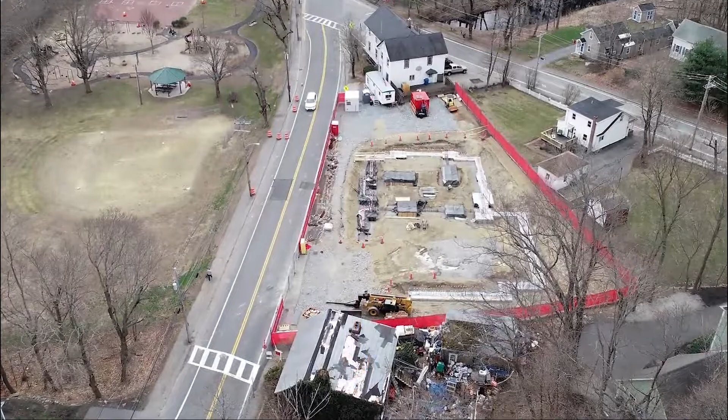There was a lot of public interest in this project, and because of that, it was really important to hire an outstanding project team. That process started with Context Architecture, who engaged all of the community stakeholders, the neighbors here in Ballardvale, the Ballardvale Historic District, the Preservation Commission, and all of the other boards and committees, including our own town building committee, which had to be part of the approval process for this project.

Context Architecture spent almost 2 years working with neighbors, working with the different boards and committees. We had late night meetings, early morning meetings, all for the purpose of bringing consensus around a final design that would ultimately serve the needs of the Andover Fire Department.

And result in a building that fit within the historic character of Ballardvale. The Ballardvale Fire Station, located in the historic Ballardvale district of Andover, was a great accomplishment for our community. We not only needed a building that fit the needs of the 21st century fire service, but we also needed one that fit the historic character of the Ballardvale section of Andover.

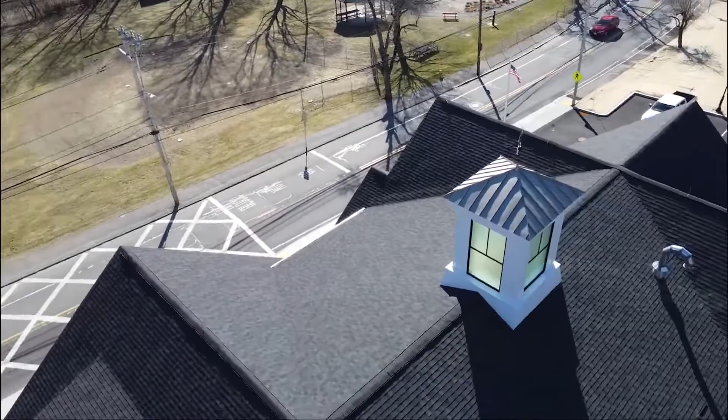The owner's project manager, PMA Consultants, worked tirelessly to keep the project moving and meet our aggressive timeline and established budget. PMA continuously informed all stakeholders and neighboring properties of project operations to ensure relationships were positive, effective, and productive throughout the construction process.

The general contractor, McKay Construction, managed its design, bid, build project on a tight site next to the existing station, which remained operational throughout construction.

The onset of COVID-19 required that McKay and the project team work together to increase safety protocols, fast-track submittals, and seek out material substitutions if needed to keep the project going on schedule without reducing quality.

I'd also like to thank the project team on behalf of Andover Fire Rescue and the Andover community. We are very proud of this project because it is a true reflection of our community. It's a reflection of the input of our neighbors in Ballardvale, and it's a reflection of the input of so many people in our community that helped make this project a reality.

I want to thank our entire project team, from Context Architecture to McKay Construction to PMA Consultants, and to all of our boards and committees and staff that were all part of this project being a success. Thank you for recognizing our efforts.

Congratulations to the project team. Did they stand? All right, we're gonna try that again. Congratulations to the team.

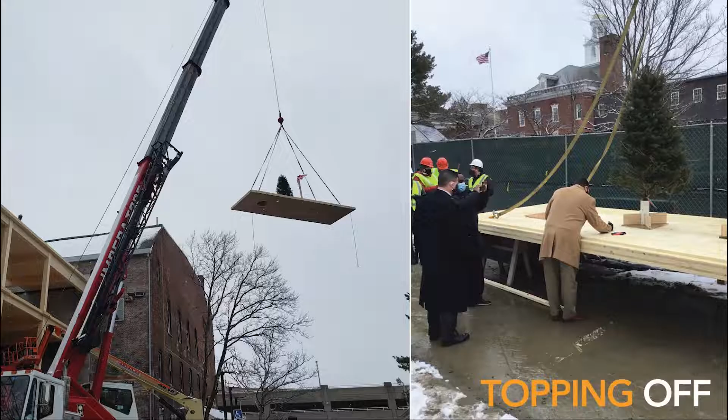The use of cross-laminated timber, CLT for short, presented opportunities for design and sustainability. The new building will achieve LEED Gold certification. The implementation of the CLT structure within the public procurement law required a creative approach with an early design assist package that could only be achieved under the CM at risk procurement model.

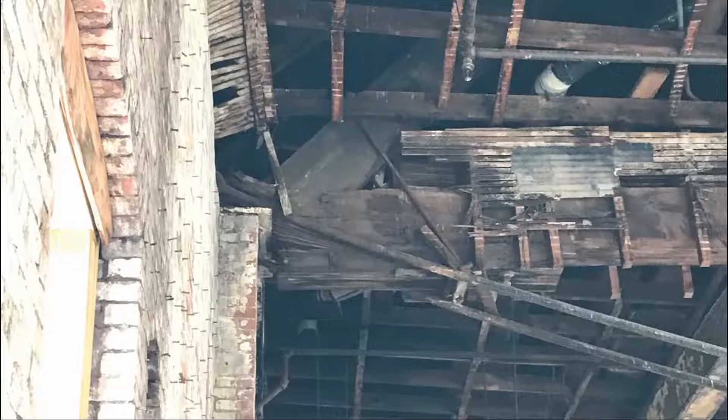The existing building was flanked with 0 lot line adjacent properties and within a few feet of busy Main Street. Several logistical challenges were solved during pre-construction, with creative and cost-effective solutions incorporated into the bid documents. During pre-construction, Bond determined that the adjacent abutting building structure had also deteriorated such that the building planned for demolition was unintentionally providing lateral support of the failed structure of the adjacent building intended to remain.

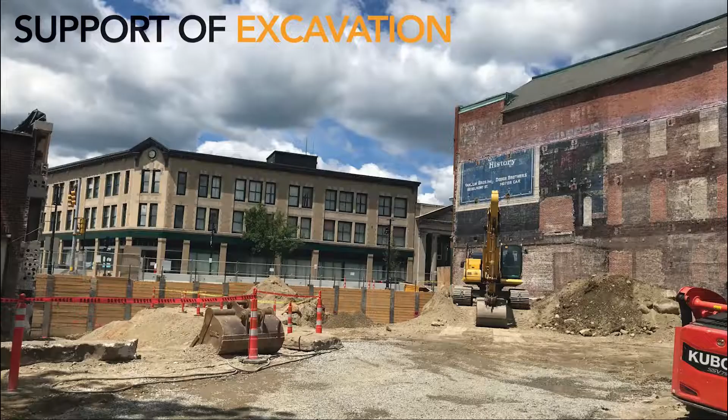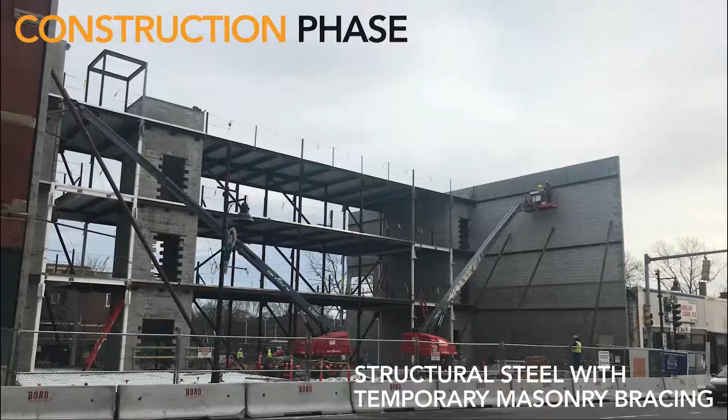Bond collaborated with the design team to develop the most effective approach to retrofit the existing occupied abutting structure to ensure that the demolition of the existing building could happen safely. Bond Building developed an approach that allowed for the 3 planned stories of masonry bearing party walls to be erected in one sequence, temporarily braced ahead of the CLT. This was accomplished with carefully planned temporary shoring elements that were pre-coordinated with the CLT structure.

With the design intending to expose as much of the CLT as possible, the placement and routing of all exposed building systems was critical. Working closely with the design team, Bond Building pre-coordinated the building systems with the CLT elements using 3D BIM technology prior to installation. Bond's partnership with DCAM and the design team allowed for timely decisions when additional challenges arose during construction. In the end, a magnificent project was delivered for which we could not be more proud of.

Congratulations to the project team.

All right, next we have building projects, new construction, less than $100 million. EMD Serono Horizon Building, Billerica, Massachusetts, submitted by Erland Construction.

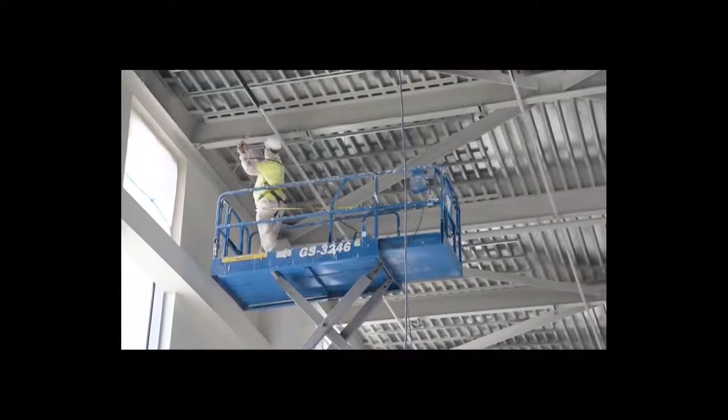If we didn't have that level of respect for safety on the project, it may have been harder to quickly change or influence people to adjust their safety behaviors in response to this new threat of COVID. But I think on this project, because of that early effort to build a safety culture, incorporating COVID protocols came a little more naturally and easily than it might have otherwise.

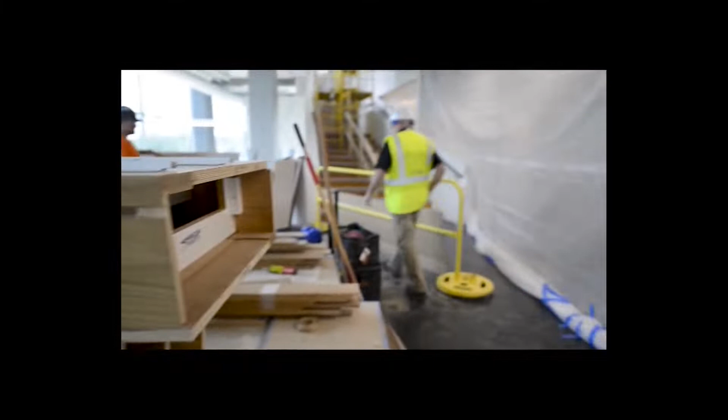Luckily, we were very proactive in buying out our materials early on, and we had the subs storing them off-site, so we really didn't get hit with any manufacturing delays or anything like that because we had everything already procured and waiting for us.

On this project, we implemented a process called Prevention Through Design, PTD. What it does is get the architect, the design people, the engineers, the safety department, and then the end user or owner all together at the table before the building is completed and drawn out.

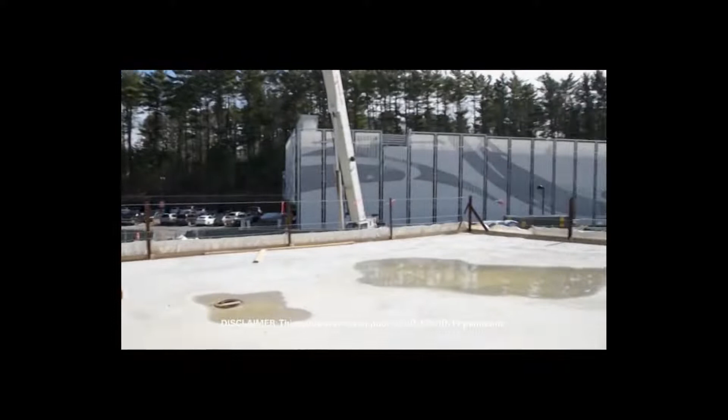There were a couple of instances, like adding roof parapets during construction, so workers never had to tie off on the roof while working up there. Also roof davits, so if we did have to tie off while working on edges, there was a way to do that.

Congratulations to the project team.

Next, we have building projects, new construction, greater than $100 million. The award goes to Brookline High School Expansion Project, submitted by Hill International.

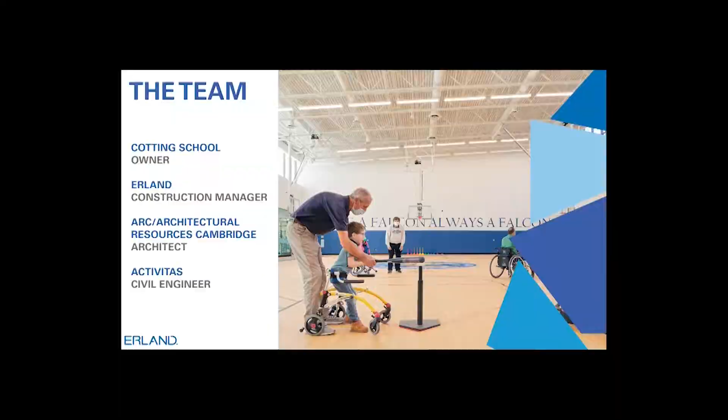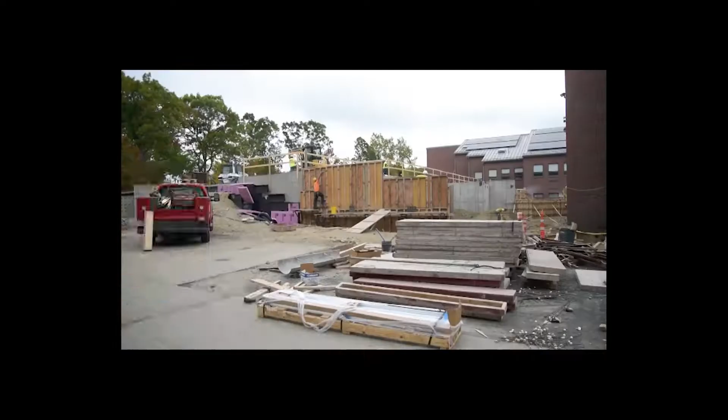Recreational spaces for Friday nights for our Circle of Friends program, with two bowling alleys. It gives us some art space, and as soon as that's completed, it unlocks a whole variety of new spaces within our school. I'm Ben Wallace, president of the senior class of 2021.

This is going to be a great addition to the school. Honestly, I very much look forward to seeing it when it's done, and I think it's going to be really great for our basketball games.

You'll see on the wall when the gym is done, the motto: once a Falcon, always a Falcon. That's Cotting School. This space is a space that we envision to bring people together.

This was typical of the meetings we had throughout the entire process, where the entire team would collectively problem solve—architects, engineers, and contractors listening to each other's concerns and coming together to solve problems successfully, which resulted in delivery of the project on time, under budget, and exceeding owners' expectations. This was a very large and complex project.

Took 30 months, but at the end of the day, it's really nice to go to a game and see the fans, see the athletes, see the community in general, really enjoy what we built and what we all worked so hard to do as a team.

It couldn't have been done without working together with UConn, with the designers, and it was a really successful project and really satisfying to be a part of.

Successful capital projects are symbolic of great project teams. The UConn Athletic District project was just that. We couldn't be more pleased with the entire team effort put forth on a challenging project built during unprecedented times.

Congratulations to the project team.

So we will move now into the infrastructure category. We'll go with infrastructure less than $10 million. Runway 14-32 and taxiways J and J1 rehabilitation, Logan International Airport, submitted by Massachusetts Port Authority.

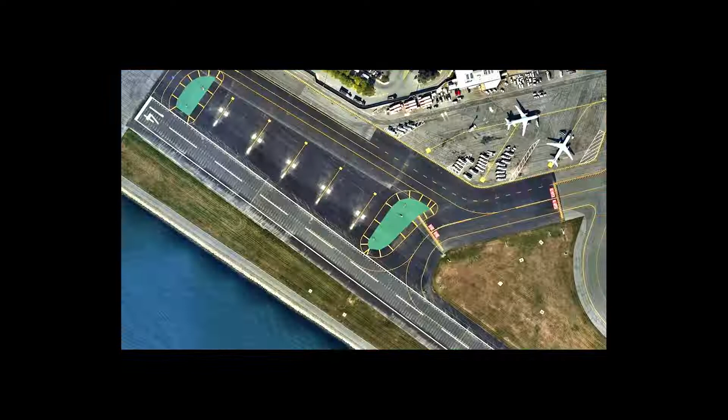At Massport, safety and security are our top priorities. We are regularly updating our facilities and infrastructure at Boston Logan International Airport to maintain safety and construction standards. Due to the pandemic, we've had to make some strategic adjustments to our business practices.

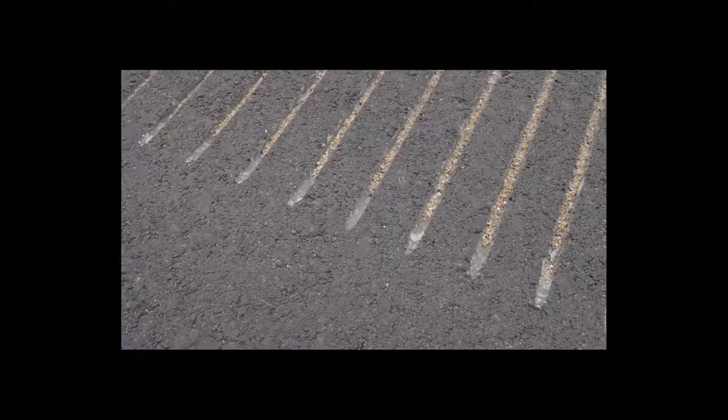This was a necessary project to improve the runway and taxiways pavement condition index to meet the FAA's safety standards, as well as improve drainage, skid resistance, and update the lighting system.

The entire project had to be done in 60 days. A group of project managers and staff worked closely together to produce a design, set of bid documents, and construction phase services on the fly.

Together, we rolled up our sleeves and got the job done as smoothly and professionally as a consultant would. The result was a successful project that was completed under budget.

Working with the Massport team, McCourt Construction was able to complete the rehabilitation work to improve the surface condition, ride smoothness, friction, and drainage characteristics of the runway and taxiways to reduce the potential for foreign object debris. Due to Massport's seamless coordination, we were able to complete this project on time.

The project schedule required a 25-day closure on runway 14-32. Through our routine coordination meetings with project and airport staff, the airlines, and the FAA, we were able to get the job done with little to no impact on the airport and airline operations.

We worked efficiently together, which allowed us to reopen the runway 6 days earlier than scheduled. The project to rehabilitate runway 14-32 and taxiways J and J1 is an example of our team innovation and creativity.

We utilized our in-house talent to design the project using 3D technologies, leading to considerable savings in engineering fee. Congratulations to the entire team who worked on this project, and thank you to CMAA for recognizing their hard work.

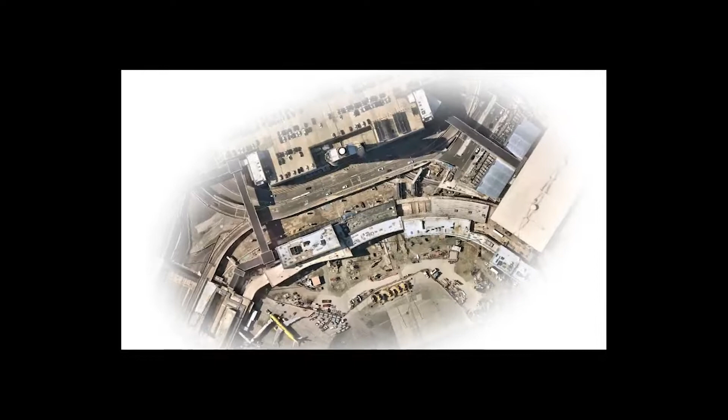The team used BIM and Lean effectively to design and construct the project within this very congested site. This design bid build project included a complex steel girder viaduct structure with at-grade roadway within a confined work zone

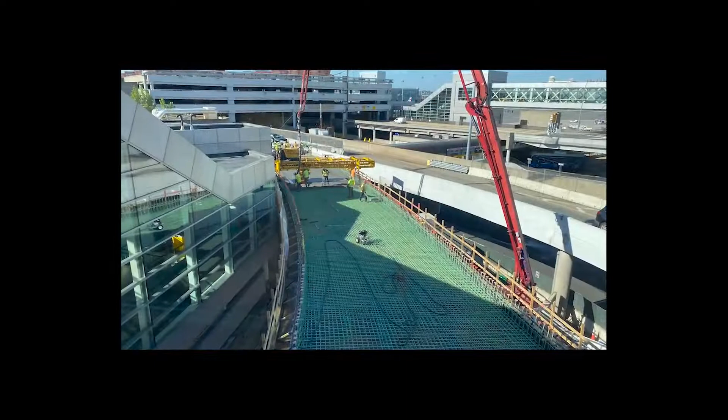and active pedestrian and vehicular traffic adjacent to and often bisecting the site.

The project also included the modernization of airport utility services, preservation of existing critical infrastructure, and detailed coordination of connection services to adjacent projects. To combat this congestion below grade, the project team made use of intensive federated 3D modeling

and clash detection during both the design and construction phases. This site presented many logistical challenges, with adjacent projects on 3 sides and the concurrent demolition of the old air traffic control tower at the center of the project.

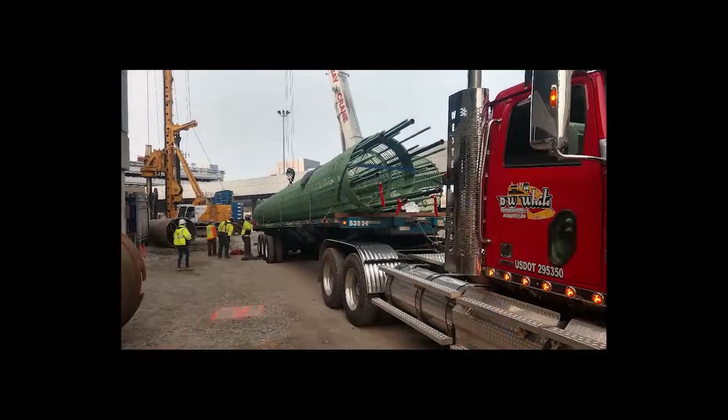Despite the congested site, D.W. White and the entire project team were still able to prioritize airport security and the safety of all on-site personnel, with 0 OSHA recordables or lost time accidents throughout the duration of the project.

The lean process has enabled us to perform efficiently and pivot effectively. We co-located in a Big Room to problem solve as a team. We use the Last Planner system to streamline our workflow through task level scheduling, pull planning, and weekly check-ins.

The transparency and accountability of lean allowed stakeholders to understand each other's needs and perform as one unit toward one vision of the completed project.

The Terminal C3A roadways project was complex and challenging, but thanks to our partners, Stantec and D.W. White, we were able to successfully complete the project and fulfill Massport's condition of satisfaction.

Congratulations to the project team.

All right, we already got Massport, so we'll just get a Stantec photo and we'll move forward.

Infrastructure less than $50 million. Exit 103 Open Road Tolling and Bridge Reconstruction Project, submitted by WSP.

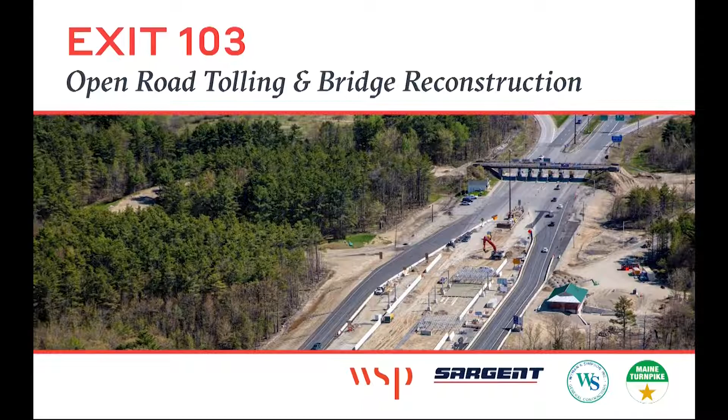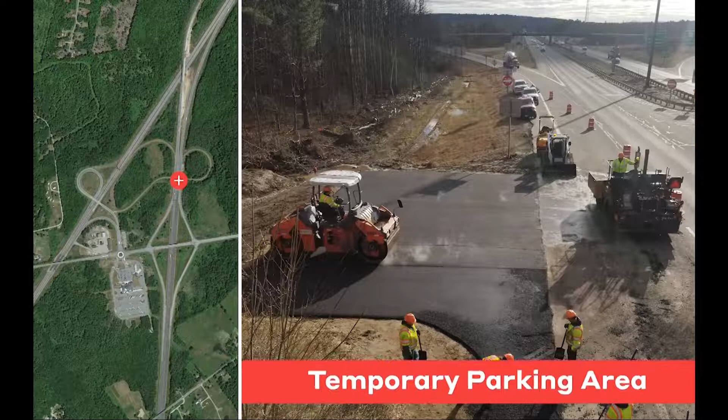Known for its natural beauty and rugged coastline, Maine attracts adventurers all year long. At one of the busiest exits in the state, Maine Turnpike Authority's Exit 103 Open Road Tolling and Bridge Reconstruction Project safely and successfully improved the roadway and kept traffic moving for both residents and vacationers. The I-295 and I-95 intersection is critical for inter-region travel and the Maine economy.

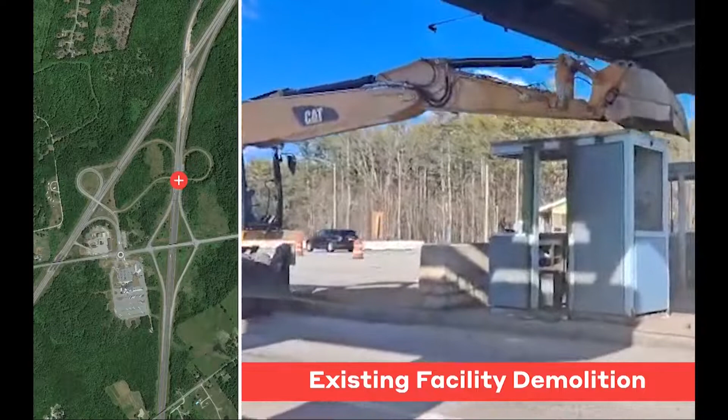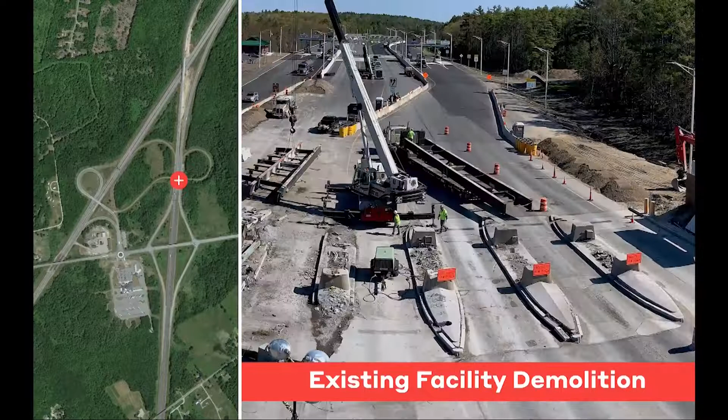Bringing together both ORT and bridge reconstruction simultaneously required a team with a singular focus and clear lines of communication. The WSP team worked closely with two separate contractors, Sargent Corporation for tolling work and Wyman & Simpson for bridge reconstruction. Multiple contractors, work area overlap challenges, and a global pandemic contributed to the project's complexity, but daily communication, innovative thinking, and creative planning all contributed to the project's success.

Expert maintenance of traffic planning aided in keeping the project on schedule and traffic moving. The use of a cable saw allowed for a less destructive demolition of an existing canopy, allowing its removal without interrupting traffic, one construction phase sooner than originally scheduled.

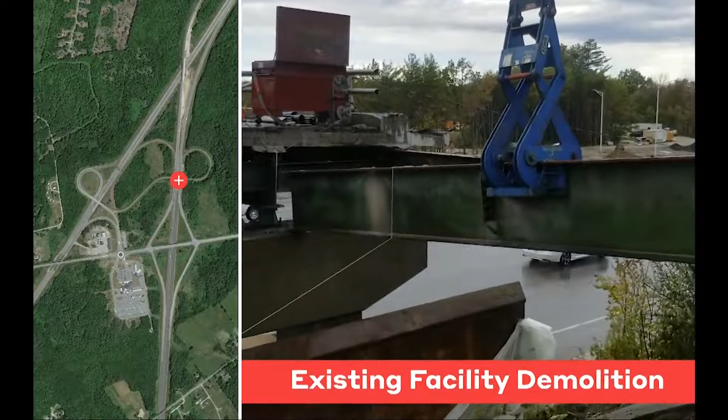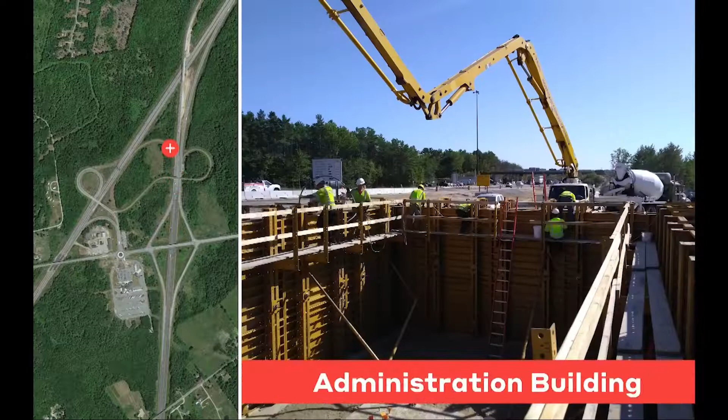Serving as an extension of Turnpike Authority staff, the WSP team partnered with each of the contractors and a field-engineered design was developed to maintain traffic throughout construction. The nimble teams met daily to discuss the day's activities and adjust, if needed, to adhere to the project's critical path schedule.

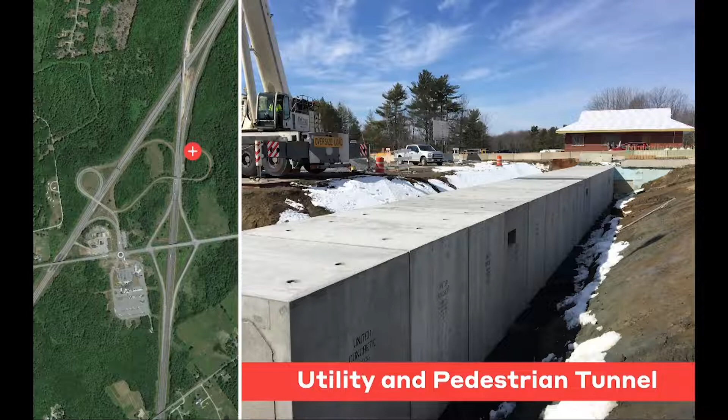Also included in the contract was construction of a new administration building and tunnel for toll booth operations and maintenance. Uniquely, this building includes a full-height basement, allowing for the build-out of full communication systems in an easily accessible space. Traditional construction materials and innovative means and methods were brought together safely, effectively, and on budget, ensuring a successful roadway enhancement that keeps Mainers moving.

Ensuring a successful roadway enhancement that keeps Mainers moving.

Congratulations to the project team.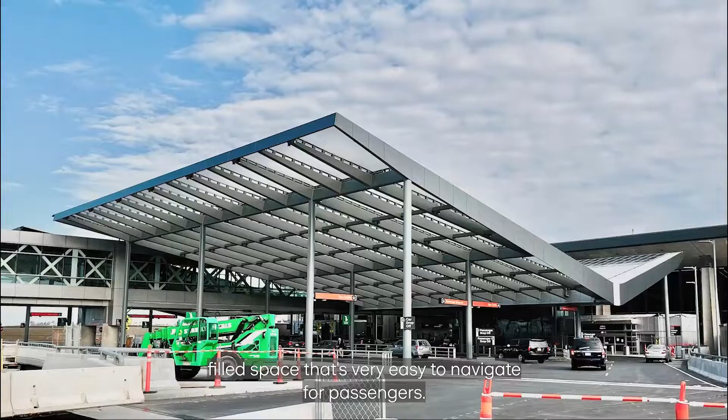For Massport, it's all about the passenger experience. This design transformed the whole curbside experience into a light-filled space that's very easy to navigate for passengers. Design innovation and sustainability are also really critical to Massport.

This air-supported roofing system is so lightweight, it requires significantly less structural steel, which of course saves carbon. The solar panels generate clean power for lighting and other canopy electrical loads with a surplus, making this a net positive energy project. This highly visible and public-facing project had extensive communication and engagement with stakeholders, airlines, and Massport's operations team.

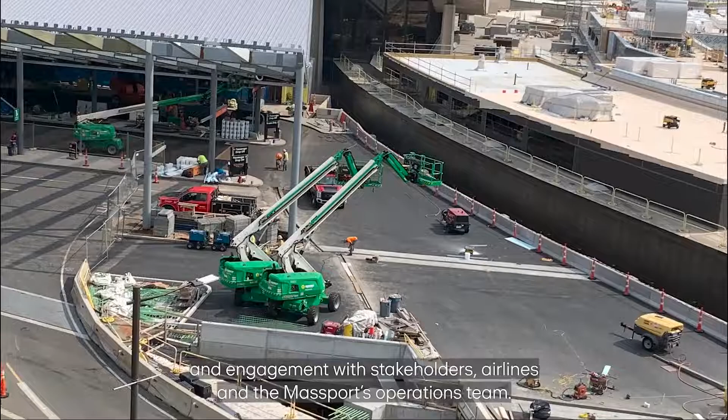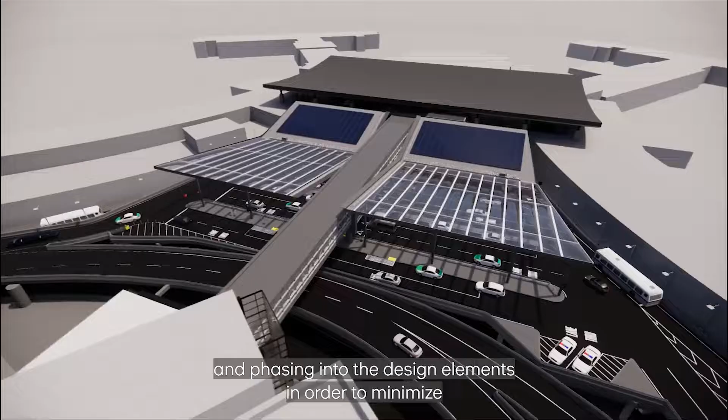These partnerships allowed this disruptive and complex project to be carried out successfully with relative minimal impact to airport operations. During the pre-construction process, our plan was to integrate constructability and phasing into the design elements in order to minimize disruption to the airport traffic and traveling public.

A tremendous amount of work went into pre-planning and traffic modeling to minimize the potential impacts to the ongoing daily operations. It was important not only to strive for zero safety incidents amongst the workers, but also to protect the airport passengers and employees throughout this project.

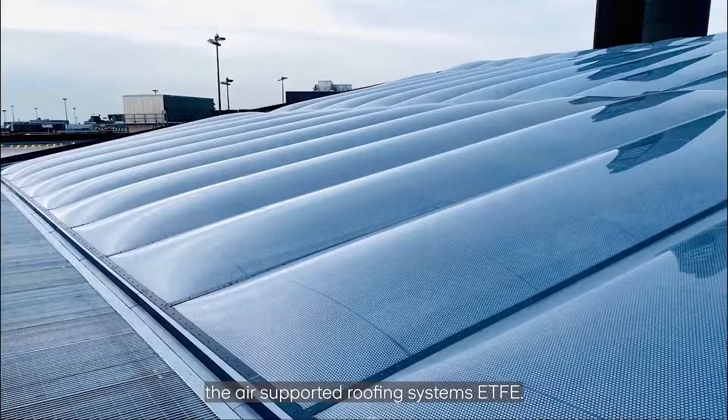The project consisted of some high-risk trades like demolition, structural steel, roofing, elevators, and most importantly, the air-supported roofing systems, ETFE. In three years, we logged over 380,000 craft worker hours with zero lost time incidents.

When it comes to lean construction, the project team worked hand in hand with Massport to implement the last planner system, practice the plan-do-check cycle, transform the big room approach into a digital space at the onset of the pandemic, all to reduce waste and promote continuous improvement throughout the project.

Massport is thrilled with the outcome of the Canopy project and would like to thank the entire team that came together to make this endeavor a success, not only for Massport and our partners, but for the traveling public that we serve. Thank you, CMAA, for recognizing us.

Congratulations to the project team.

Infrastructure greater than $100 million: Berth 10 construction, Conley Terminal Modernization Program, submitted by GEI Consultants.

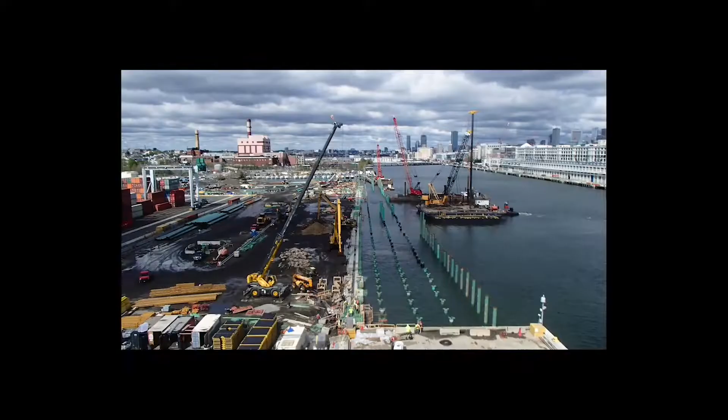The new Berth 10 creates 1,300 linear feet of berthing and is designed to accommodate 14,000 TEU post-Panamax cargo vessels. The deck is supported by 862 26-inch and 30-inch diameter steel pipe piles, between 60 and 105 feet in length.

Dredging and underwater rock blasting were implemented to achieve the desired draft of -50 feet mean lower low water. Work had to be coordinated around a time of year restriction issued by the regulatory agencies.

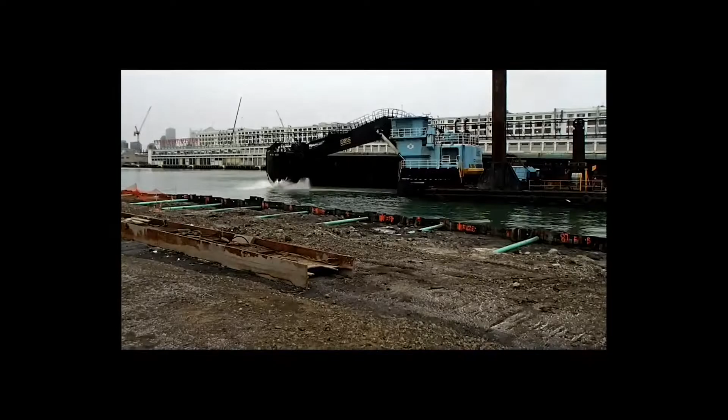Construction had to take place within an operating container terminal without impacting existing operations. Waterside work had to be coordinated within a narrow 600-foot wide channel, adjacent to active cruise and container vessel operations. Work took place during the start of the COVID pandemic.

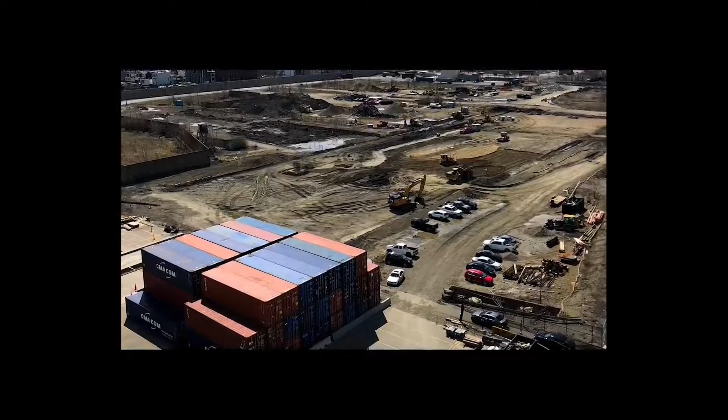The team utilized the Cooperative Soil Management Plan, where no urban fill or oily soil was transported for off-site disposal in landfills. Instead, it was treated, rendered inert, or processed and retained on-site.

Massport maintains an extensive outreach program with the community and incorporated community input into the project. The team fostered and maintained a close, productive relationship with the contractor throughout construction. The project was completed ahead of schedule, finished under its budget, and had no cases of COVID.

With the completion of the new Berth 10 and commissioning of the 3 new cranes, Conley Terminal is big ship ready. This regionally significant project allows the Port of Boston to remain competitive and ready for growth.

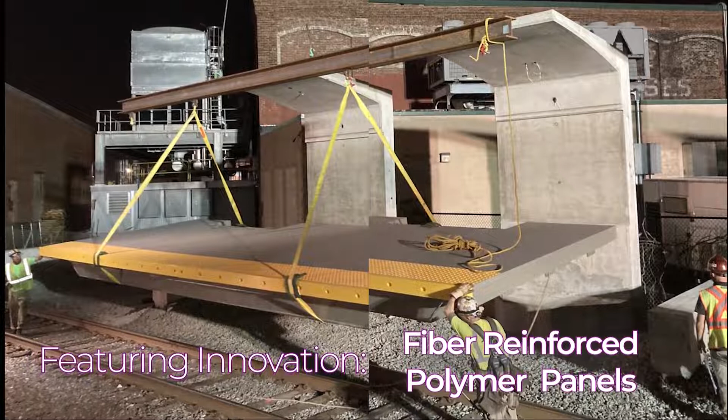This was the first state permit to use FRP for a station. Extended life and low maintenance are key for MBTA.

While the signal and PTC were getting upgraded, 6 track crossings were reconstructed with minimal impacts to rail operations and car traffic.

AECOM wishes to thank MassDOT and the MBTA for the opportunity to design the station, and CMAA for the recognition of this project.

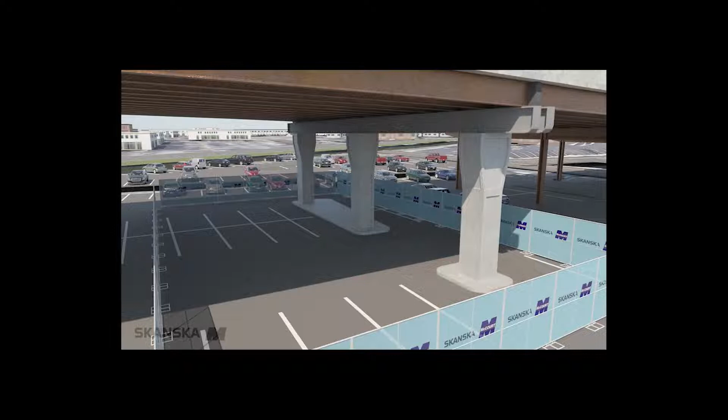The design for the Chelsea Viaduct replacement was simple: cast concrete piers around the existing columns, install new steel sister beams, demolish the existing bridge superstructure, and...

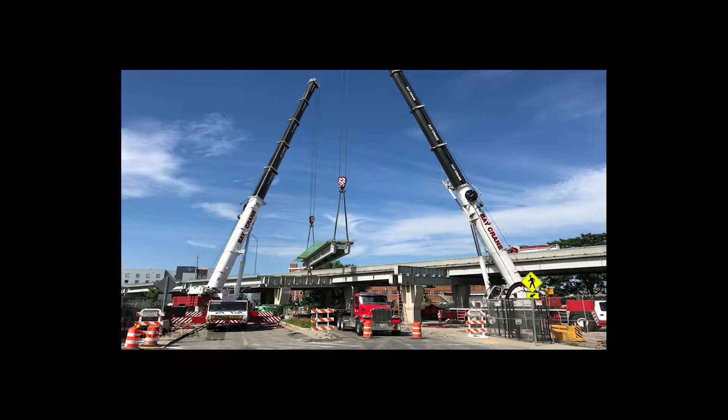Construct a new deck that included the use of 313 prefabricated bridge units, the most ever used on a job in New England. The contract documents suggested the work to be performed at night, on top of the elevated roadway, in 2 separate work zones.

Steel towers were to be erected under the roadway to support it during the work. Each night, roadways were reduced to 1 lane each way with zipper barriers. There were heavy fines in the morning if the lanes were reopened late.

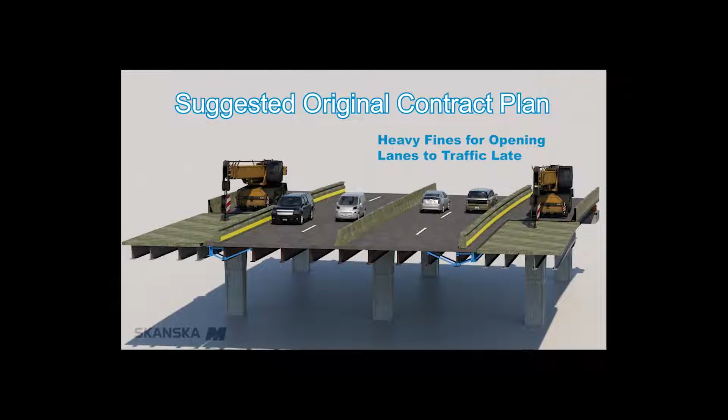The Skanska-McCourt team devised a plan to perform the work within a single, permanent work zone, with most of our equipment operating from the ground during the day.

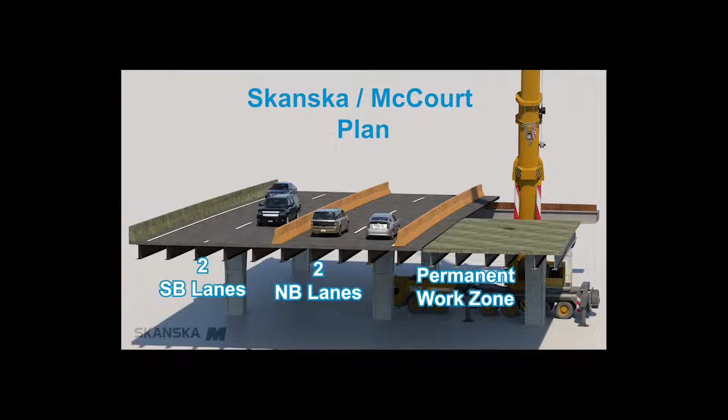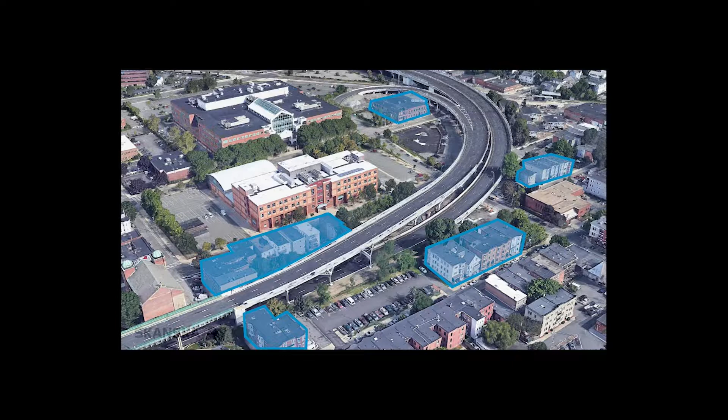This significantly reduced the impact of construction on the Chelsea abutters. Many of their houses were a few yards from the elevated roadway structure. The elimination of the below-deck support steel and the zipper barriers significantly reduced the risk and resulted in a savings of $15 million for MassDOT.

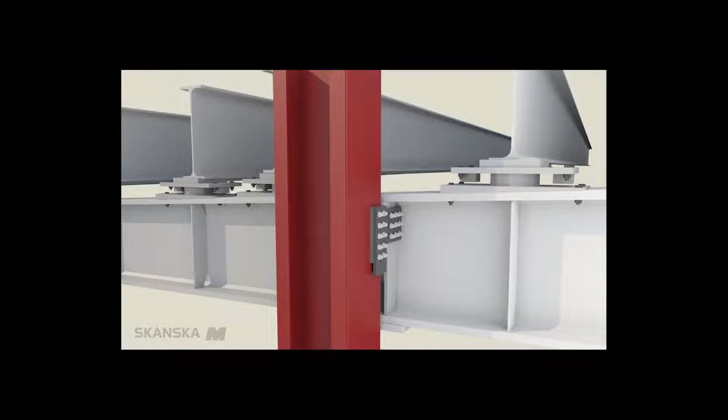Our team modeled the entire project in 3D to perform a constructability analysis. We detected some issues with existing column locations. We helped with the successful design solution of a critically sensitive connection detail between the new and existing bridge structures. We modeled the bearing connections of the PBUs and the sister beams, successfully eliminating potential fit-up issues. We worked with HNTB to make the reinforcing steel fit within the formwork for the cast-in-place concrete piers.

At the conclusion of construction, Mass DOT expressed their satisfaction with our transparent and collaborative team approach to the work. They acknowledged that our risk mitigation protocols helped make the Chelsea Viaduct project one that we can all be proud of.

We are thrilled to welcome members of this stellar project to the stage to share some additional insights into what made this project a success.

Forgive me for keeping your bios short. Paul Panini is Senior Vice President for Skanska, responsible for all civil operations in New England. He also founded and manages Skanska's National VDC Center of Excellence in Boston. Paul was instrumental in the creation of the Skanska-McCourt Chelsea Viaduct work plan and assisted in various engineering solutions during the job. Paul received a bachelor's degree in civil engineering from Tufts University.

Rob Pine is Vice President of Operations for Skanska and has almost 30 years experience in construction supervision and management, concentrated in heavy civil construction projects. Rob was instrumental in the de-risking of the Chelsea Viaduct project. He served as the project executive for the job, overseeing all aspects of the work, and was the primary contact with the Mass DOT management team. He has a bachelor's and master's in civil engineering and is a registered professional engineer.

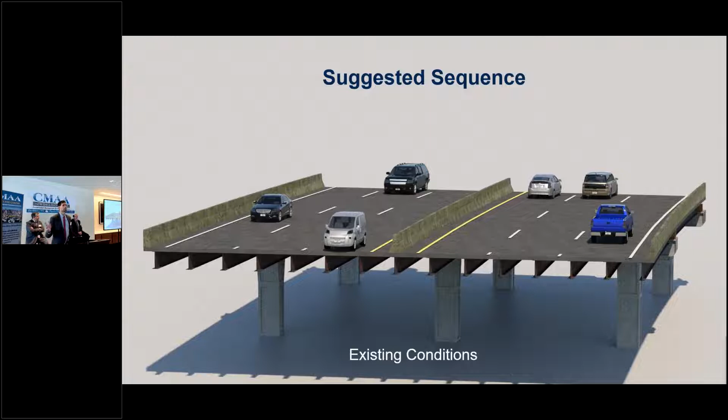The suggested sequence for the project: we had the Route 1 viaduct heading north and south through Chelsea, 3 lanes in each direction as the existing condition. The suggested sequence was to reduce those 3 lanes down to 2 in each direction using a zipper barrier to create smaller daytime work zones, and then at night use that zipper barrier to create a 2-lane work zone to actually achieve anything.

It's such a tight area, such a dense community, this was the only way to go forward with it. You can see underneath there a little bit of the blue overhang bracing, which was to be the whole length of the job per the suggested sequence, based on cut lines, existing framing, and all of those details.

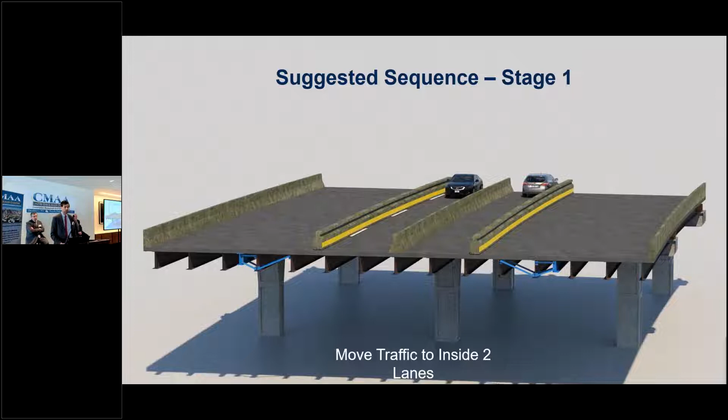So we've reduced our lanes down to 1 each at night, and now we have a work zone where we can actually start doing some demolition and reconstruction. You can see the blue shoring towers that come into play here. Originally, a lot of the equipment was planned to be staged on the deck - a very deteriorated structure, which is why we're replacing it. So that was a risk we looked to mitigate and improve upon.

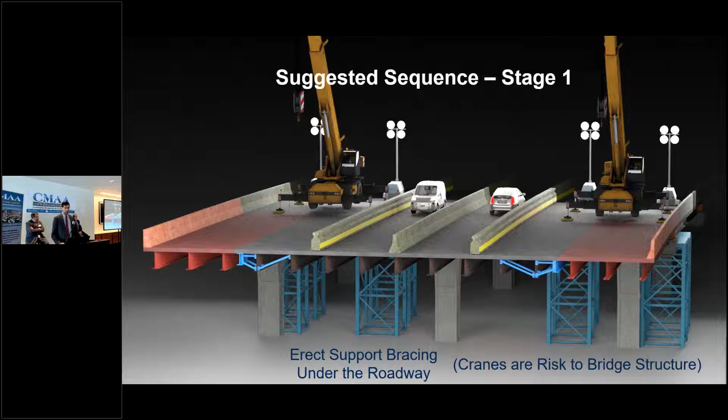So each night you take your lanes down to 1, go in, start to do some demolition, and put the PBUs back. That was every single night - each night was its own rapid construction sequence.

You can only move as fast as your slowest link, right? So there were some inefficiencies there that we looked to improve upon, creating more permanent work zones so we could produce better productivity, better schedule certainty, and everything that comes with that.

As far as the traveling public goes, the zipper barrier is difficult - you rely on the equipment which moves it, and there's a weather component to it. If there were any challenges or differing conditions that came up during each rapid construction night, that had a potential impact on the traveling public the next day. So that was a big risk for us, for the owner, for the traveling public, for everyone. That was one thing we really tried to focus on changing.

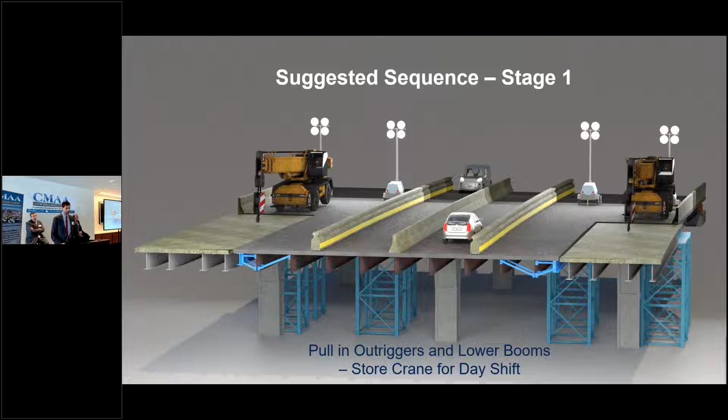To take you through the rest of the suggested sequence: basically it was 3 stages. We worked from the outside lanes in. You can see here this would be a daytime condition where we're back to 2 lanes - we've replaced a piece of the bridge, and we're getting ready to do it again each night.

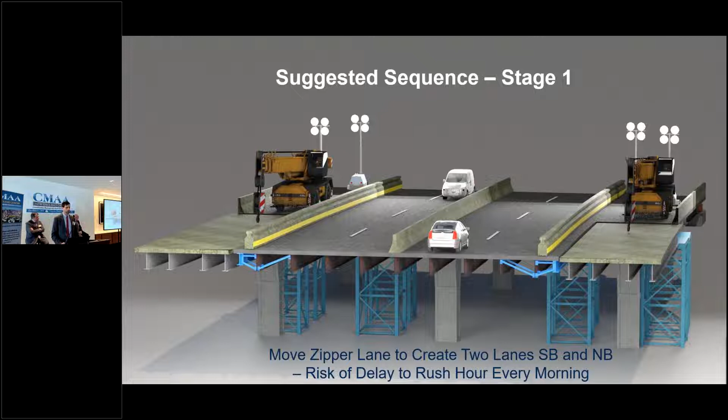Stage 2, running up the middle, also provided its own unique challenges where you have 2 single lanes of traffic in a barrel on either side of you. For the traveling public, emergency response is really difficult here - we've got 4,000 feet of viaduct, and to get a tow truck in there to service a broken down vehicle, you're doing a lot of extra moves you wouldn't have to with 2 lanes side by side. Also, working in a tight zone like that for the workers is just an inherent risk. So that was something we really focused on changing and improving upon.

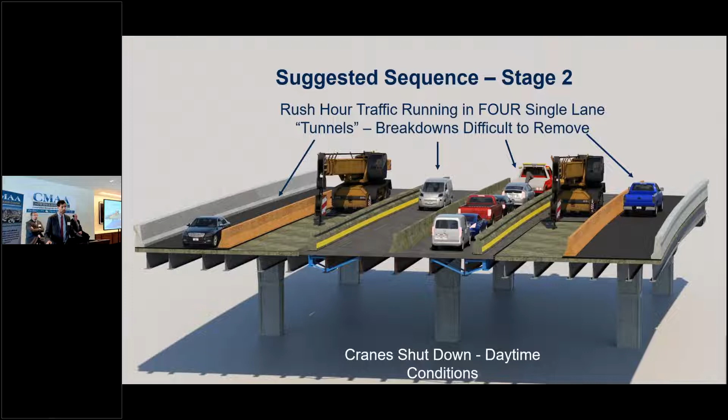Risks and realities that we came up with: the demolition and PBU erection was too much for one season. Another interesting thing with the suggested sequence was that in the first year, you build all the substructures - concrete columns with sister beams running underneath the existing structure, about 4 inches underneath, ready to receive PBUs to let you do this in a rapid fashion. That was considered the first season. The next season, you get up top and start doing demo and reconstruction. It was a lot of work to envision doing all of that in 1 year.

So the sequence that we came up with allowed us to stretch the schedule across both seasons on the superstructure side, which again made it more of a controlled build for us. The majority of the work, as shown, was to be performed at night.

This is a really, really dense community. There are areas where you can reach off the side of the bridge and you're touching the fascia, the facade of someone's house. So demolition, vibration, noise, dust, all those things at night, that was going to be an impact to the community and all the abutters, and something that we really wanted to improve upon if we could.

The zipper lane, which I talk about, the weather and the equipment, that's just a risk of using the zipper barrier. The reliance between demo and PBU erection, again, the inefficiencies of you're only as fast as your slowest operation, because everything has to be completed every single night.

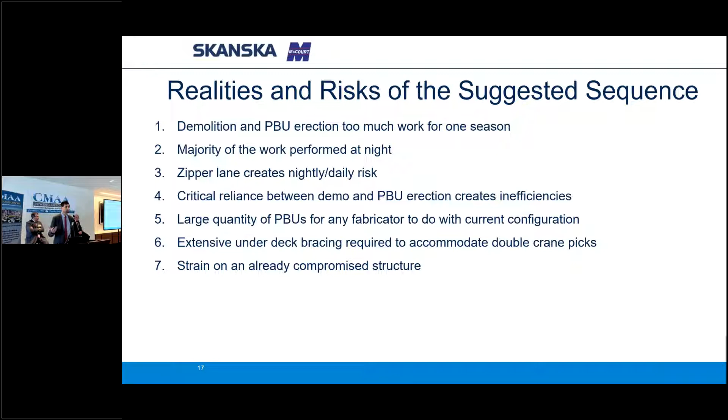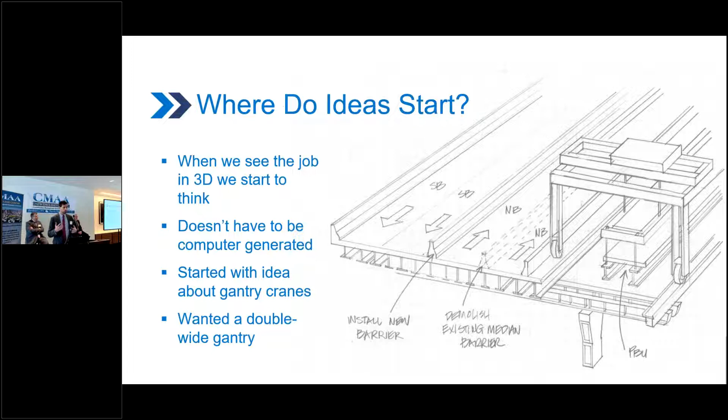So here's what we did. We started back at the main office before we bid the job with some conceptual ideas as to what we could do to create more permanent work zones. It started in sketches and migrated into a 3D model. We had a gantry scheme at first, which we moved away from, but that was kind of the origins of it.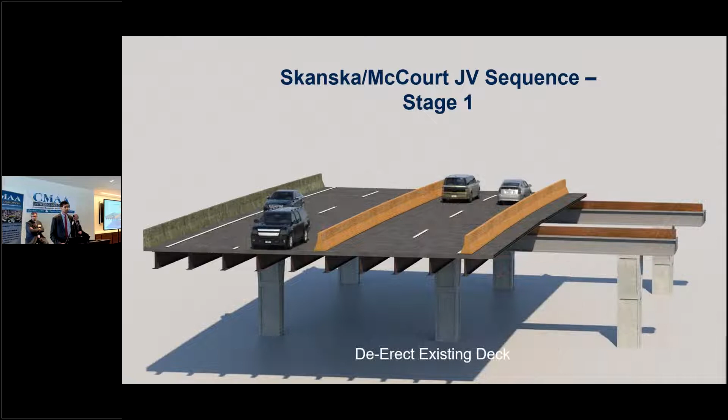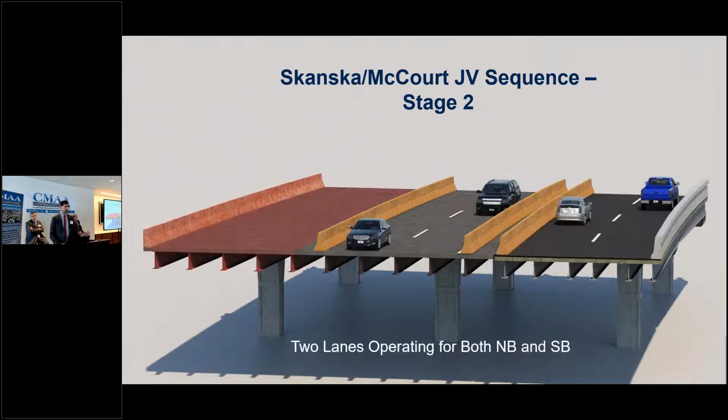And instead of working in thirds from the inside out, we essentially just created 3 larger, call it 2-lane, work zones. All crane picks were from the ground, as you can kind of see here. It was just a lot more of a controlled way to attack the work.

So moving from our stage 1 on the north side, stage 2 on the south side, and then coming right up the middle—you can see down the middle is where we decided to take that cast-in-place option to release the strain on the fabricator. These picks in the middle are a little bit more complicated, running along the outsides, and you can get the crane right up on it.

These were heavy units, 80 to 90,000 pounds, 120,000 at the max. So all of these are 2 crane picks. We had 600-plus critical 2-crane picks on the job, but we were able to reduce that a little bit when we went up the middle with cast in place.

Finishing with the median barrier and restoring 3 lanes in each direction. So again, I touched on a lot of these things, but just to sum it up, we wanted to focus on the abutters, the traveling public, our workers, and benefits to MassDOT.

The biggest benefit to the abutters is moving nighttime work to day and all the things that come with that: the noise, light, and vibration.

For the traveling public, the zipper barrier was a risk for us, and we were able to remove that. We used steel zone guard instead, permanent work zones. The breakdowns in the single lane barrels, we were able to minimize that as well. We always have 2 lanes next to each other, so access for accidents was a lot easier.

Efficient work zones, as I mentioned, more schedule certainty, less traffic shifts as well, which was a positive for the public, and less of a risk of opening the road late.

With this sequence, we were able to start viaduct construction on the superstructure in the spring of 2019, when it was originally planned to be the spring of 2020. So we were able to turn over portions of the new deck early, get people off the old structure and get them onto the new one.

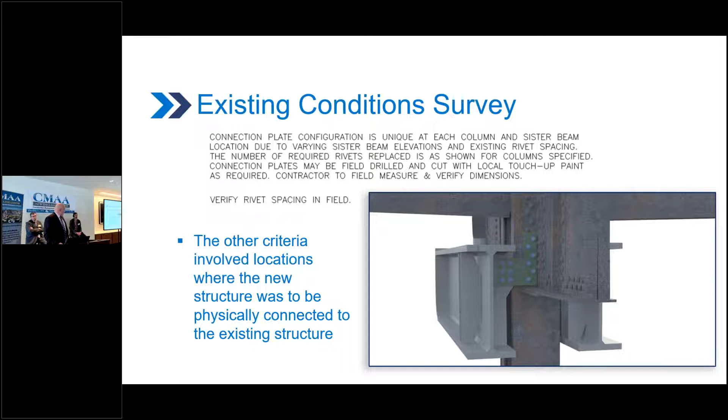Because that design element was so critical, the contract required us to do an extensive existing condition survey. So what we had to do was really 2 surveys. We had to survey all the column locations—there are 151 columns on the job.

And we had to survey the bottom of the steel, some of the cross bracing, a lot of the steel elements. Then we also had to survey the location of that connection plate. We were going to fabricate a new plate from the sister beam to the existing steel that had to line up with those rivets that were there. So we had to as-built all that to figure out all those plates, shop drawings.

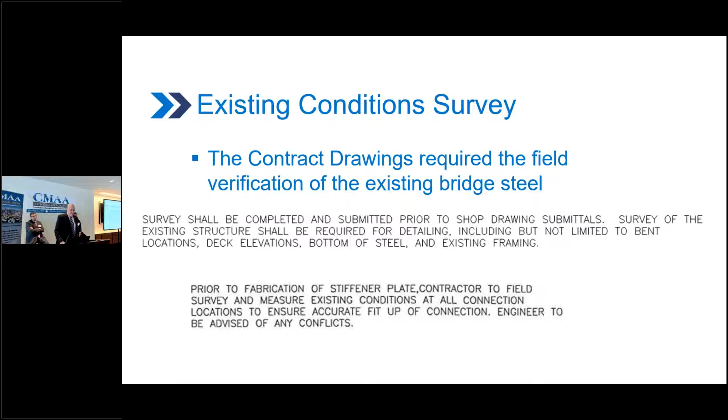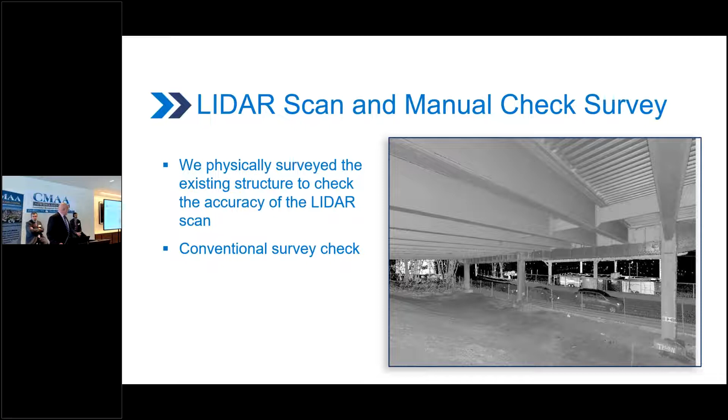So to check the column locations and all the steel, we did a LiDAR survey. We also checked that with conventional survey at many locations just to confirm the data we were getting from the LiDAR. Then to do those connection checks, we used a handheld 3D scanner—this is an image actually from the scanner. That allowed us to pull that into CAD and locate all those rivet heads.

So what we found after these 2 surveys is a few things. The first was that the columns were not exactly where everybody expected them to be. The tolerance—they were out of location in the worst case up to 3 inches longitudinally and 2 inches transversely, and that was beyond the design tolerance for the connections.

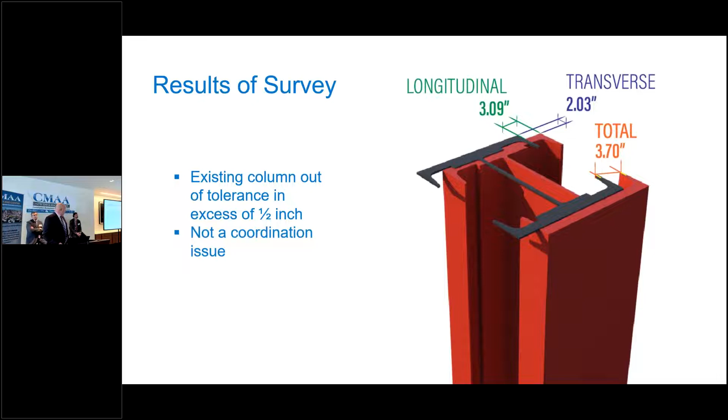So there we go, sorry about that. Basically, there was a 1/2 inch tolerance at the connection.

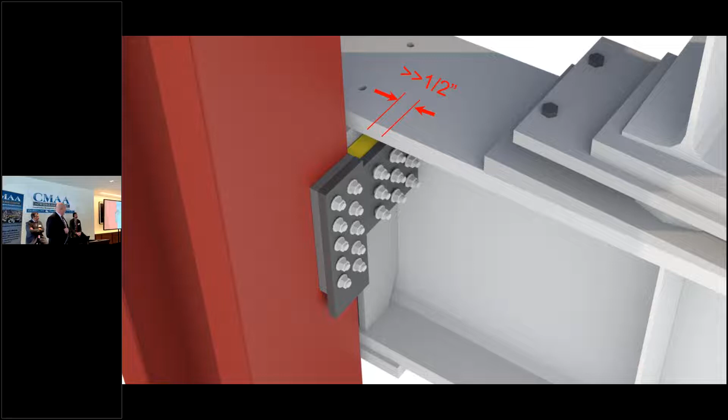On the left-hand side, the red is the existing column. On the right-hand side is the sister beam. That plate is the connection that was in the original design. It was about a 1/2 inch tolerance that we made up with shims and drilling and reaming, but that was the design tolerance within that connection.

You can also see here, in the top left, some of the sister beams actually interfered with the column, so the sister beam couldn't be installed.

At this point, there was a decision to be made because we really couldn't move forward on the job. The way the job was designed, as you saw in the video, the existing steel column was encapsulated with a new concrete column and corbel, and the steel column was in the center of that new concrete column. So with the columns off, there was a problem.

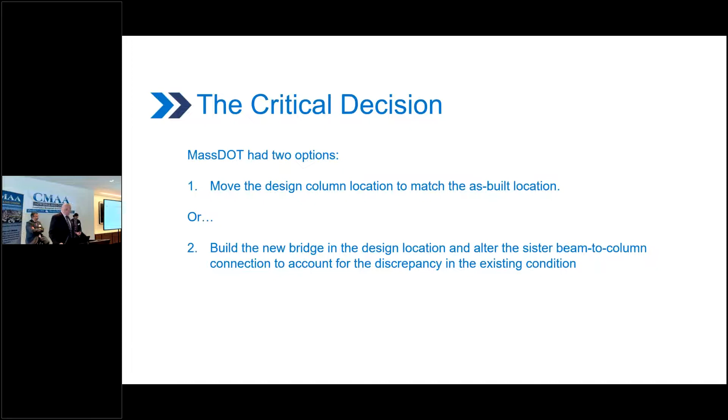The two choices were to move the concrete columns, which would have involved a redesign, relocation, and recalculation of the whole structure, or to leave the new columns where they were and relocate the existing column within this concrete column, adjusting the connections to accommodate that. So really what we did is just that.

This again is an image of the proposed connection, and this was the solution. It's a simple sister beam to sister beam connection, as you can see by the angle between them. That was a lot of collaboration to get there, but it was a pretty simple solution.

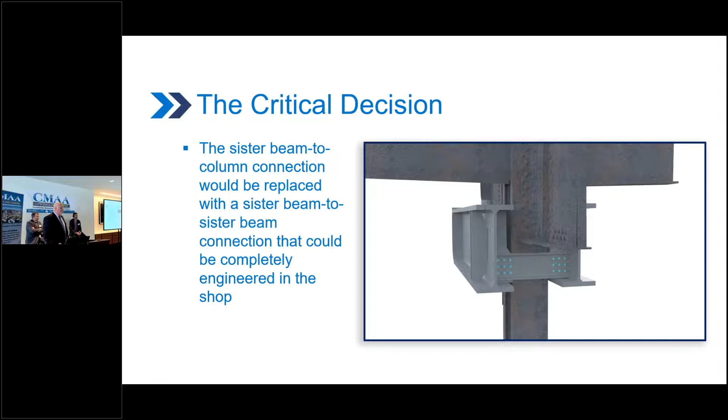Changing that connection also resulted in a few other things. Some of the rebar within the column had to be upsized, and we had to add additional anchor bolts into the top of the corbel. So those had to be checked for constructability.

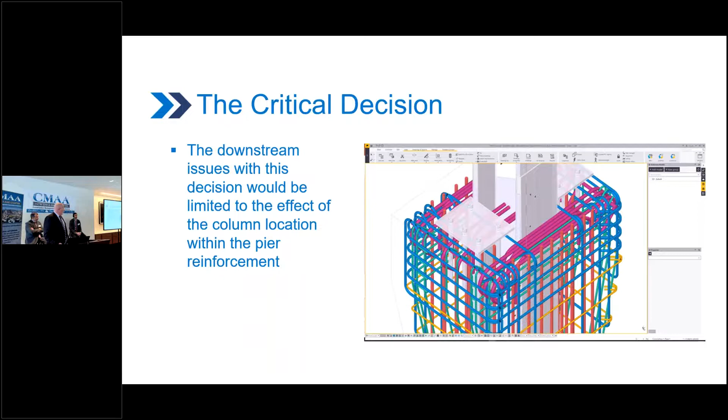What we ended up doing is modeling all the rebar in every location, putting the new anchor bolt locations in, putting all the new rebar in, and we learned there were some conflicts. So we worked with HNTB and resolved all those conflicts before we got in the field. Certainly a lot simpler than bending and cutting rebar out in the field. It was a great collaboration there.

At the end of the day, this solution allowed us to release the steel for fabrication almost on time. The time we did lose, we were able to make up within the job. That sister-to-sister connection was a lot simpler, and we finished the job. It was extremely successful from this point on.

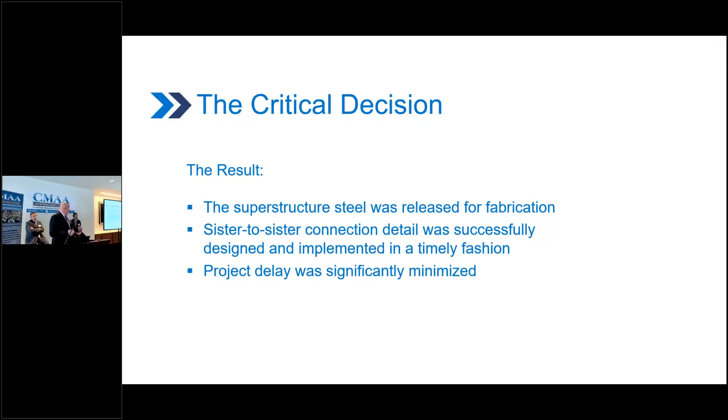It was a great collaboration between the joint venture, MassDOT, the owner's rep Jeff Paul, HNTB, FHWA, and the City of Chelsea. Even though it was a bid build job, we collaborated very similar to a design build job. We tackled the problems together, we solved them, and it really was a success for all parties involved.

So with that, we'll open it up to some questions if anybody has any. Or anybody? That's good, everybody wants to go home, huh? All right, then I guess I'll give it back to you, Austin. You can finish up, thank you.

Thank you, gentlemen. All right, who's ready for hour number... just kidding. I'll wrap up our event and get us all back to work, or to a long weekend, or like myself, to a nap. A lot of work went into putting this on, and I'm going to get a good night's sleep tonight.